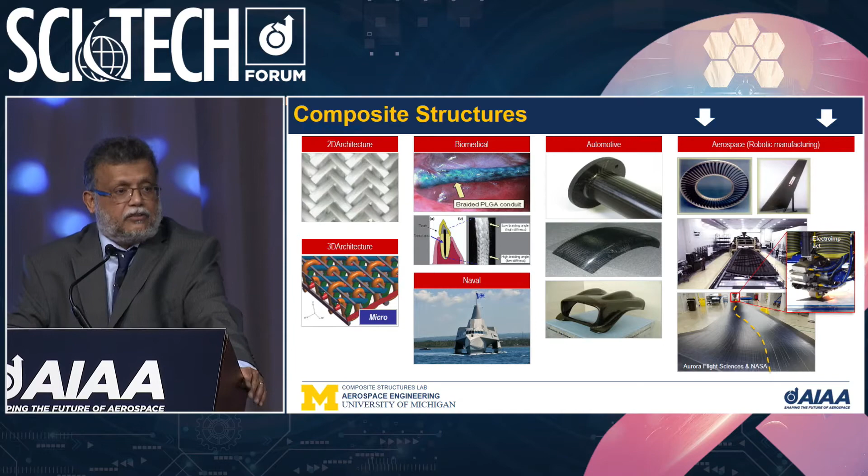In aerospace, one of the advances taking place right now is the ability to tailor and use steered fibers, where the fiber path can be tailored as shown in this slide, showing a wing surface built by Aurora Flight Sciences, now part of Boeing. There are tremendous advances, and that particular wing is now at the University of Michigan atrium because my colleagues and one of my former students were involved in the design.

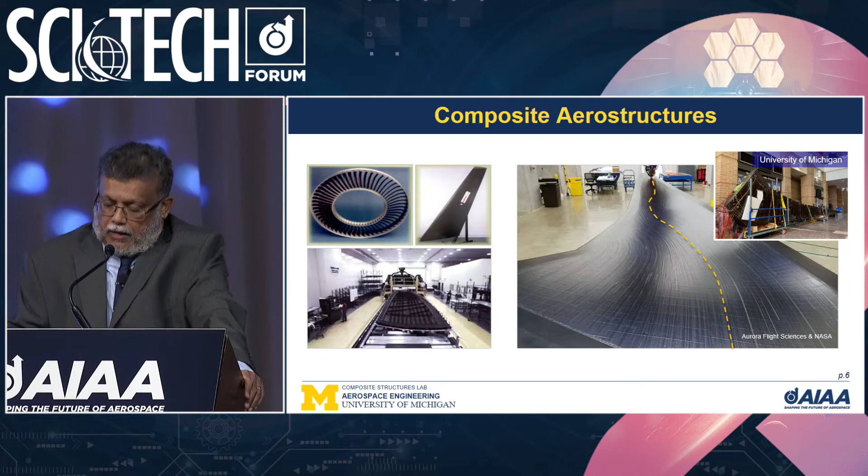There are many parameters that go into construction of an AFP type structure: the machine, the layup head, the slit tapes that are laid up to make the structure, and control parameters such as tension in the tape, temperature, etc. When we develop digital tools, we must account for the effects of the manufacturing process on the finalized structure. I'll come back to comment on this later in my talk.

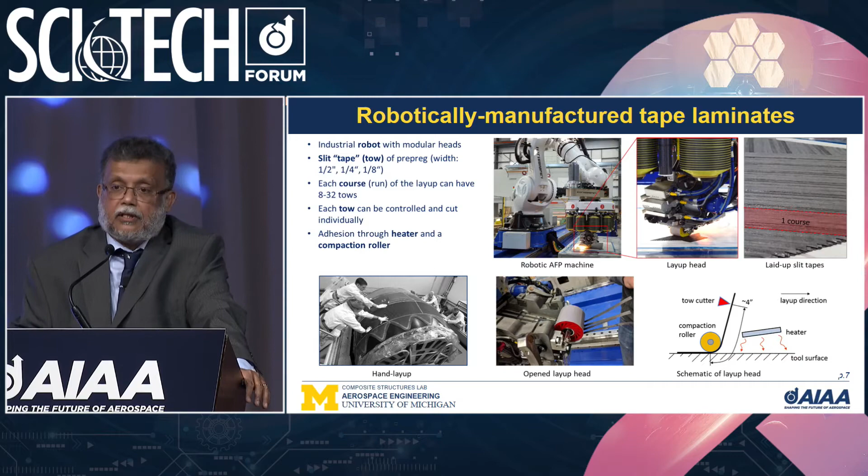Along with the tape structure, you are necessarily introducing length scales, all the way down from the molecular level. We heard talks at this conference where researchers studied curing of a thermoset resin at the atomistic level. If you track that process to the structural level, you find the material has different length scales, starting at the atomistic level and going up in hierarchical order. The question becomes: if you build digital tools, at what level do you encompass these details, and what are the effects of those details on a particular outcome you're interested in?

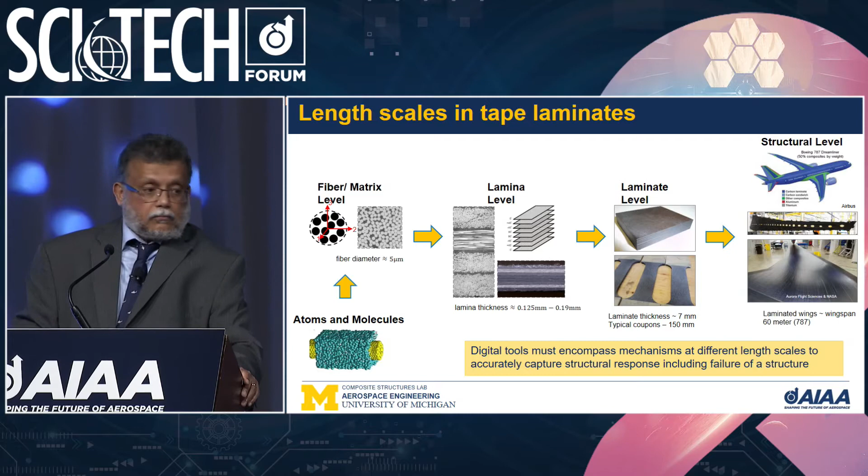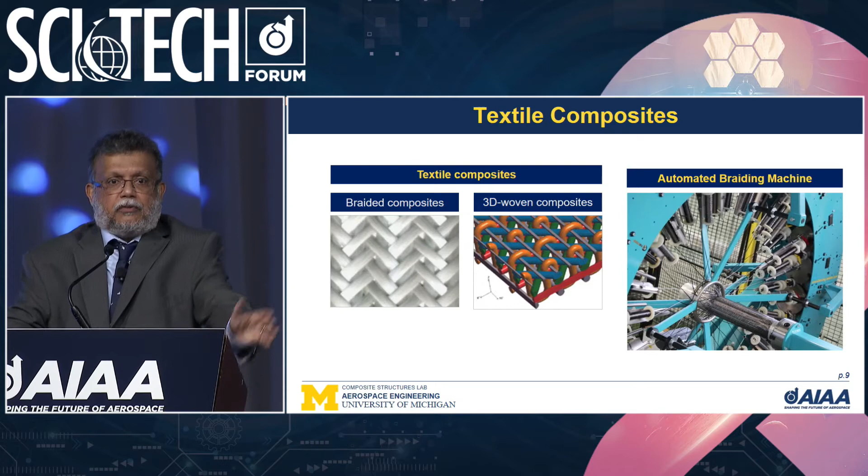Textile composites are another type of material extremely useful for the aerospace industry. Here I'm showing examples of braided, 3D woven composites, and a picture of an automated braiding machine. These types of automation allow designers to realize structures they could not otherwise manufacture with traditional approaches. So the design space for composite structures is becoming larger as we adopt newer manufacturing techniques.

Along with the manufacturing process of textiles, again you get length scales coming into the picture. Here I show a 3D reinforced composite, and within that structure you get different tows. Within the tows you get fibers and matrix, and you have a binder tow that binds all the layers together. All of these details become important when we look at the performance of a composite structure, particularly performance in fatigue and when we want to look at ultimate loads, etc.

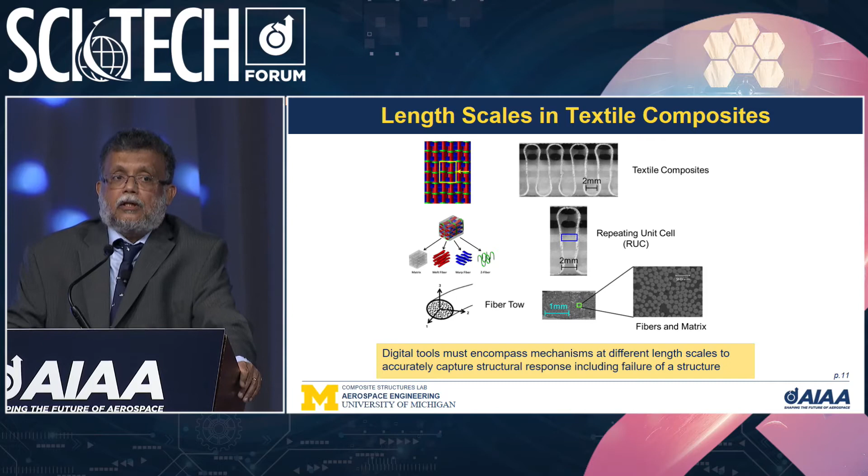Now, the building block approach is a mainstay of the aerospace engineering structural development process. This chart, from a paper by the director of Boeing BCA, Steve Chisholm, nicely captures what happens in the building block process. You have material property evaluation at the bottom of the pyramid, design value development where you do subscale tests, and then analysis, verification, and tests of a larger structure, including a final load test for a built airplane, for example.

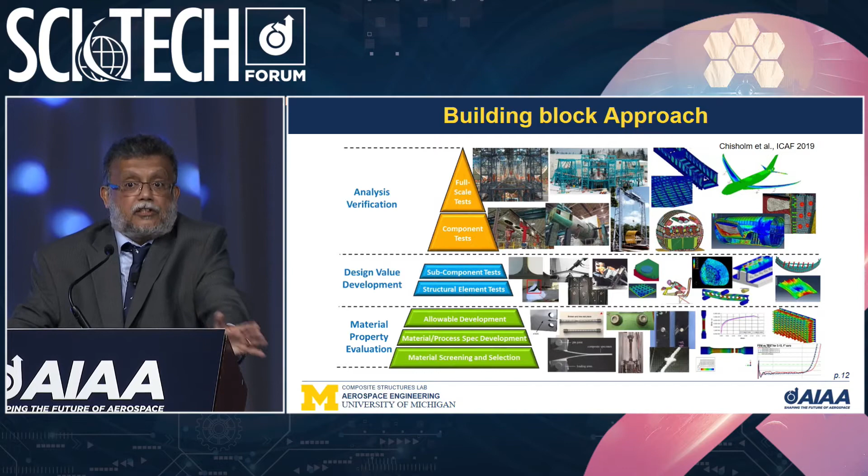On the right-hand side, I show numerical or digital tools that attempt to produce or predict what can come out of a building block experimental approach. So the final goal of a digital tool is to be able to replace that building block approach, except for the top of the pyramid, using digital tools for the rest. If we can do that, it will lead to tremendous cost savings.

Steve Chisholm coined the term smart testing in that paper. I like that, because it means you can combine selective tests with digital tools that are verifiable and validated, to save the funds needed for unnecessary tests used to validate a design process. When you develop digital tools, the design process is accelerated, product development occurs faster, costs come down, and your design space also becomes wider.

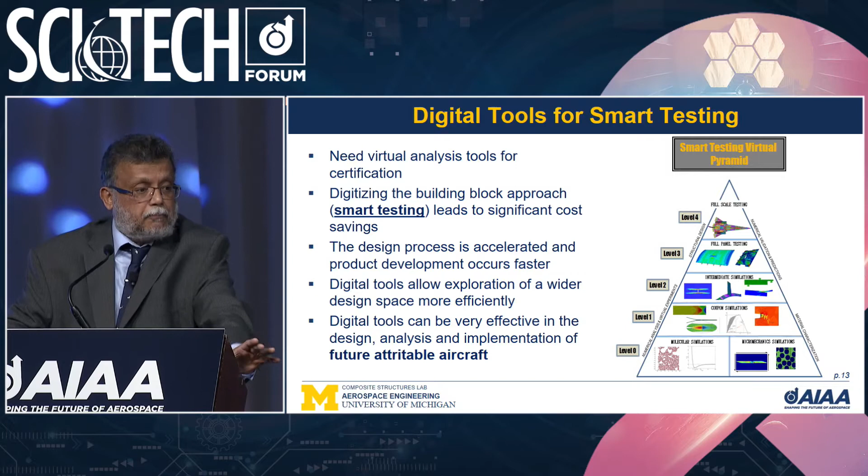Furthermore, you heard in the plenary talk the need for attritable aircraft in the future. If we are going to win in developing attritable aircraft, digital tools become indispensable. Without them, it will not be cost effective to take on attritable aircraft. So I show a smart pyramid building block, where every layer is a virtual test, not a single layer done using actual tests. They are all done virtually. So the word smart testing is appropriate for such a pyramid, perhaps except the last final test at the top of the pyramid.

Digital tools have been around. The NASA 2040 roadmap calls for developing integrated computational materials engineering, or ICME. Myself and others have added the word 'structures,' because for this community we need more than materials engineering; we need to design the material along with the structure. So instead of ICME, a more appropriate term is ICMSE, which encompasses all the tools used in airplane and spacecraft design: structural analysis, manufacturing, material databases, MDO tools, integrated into a digital framework for the design process.

First I want to talk about digital tools for performance modeling. Many in the audience know you don't need sophisticated digital tools for every problem you encounter as a structural engineer. For example, buckling, free vibration, and certain post-buckling problems don't require high fidelity. Standard finite element commercial software can handle these as long as you know the element types and correct boundary conditions.

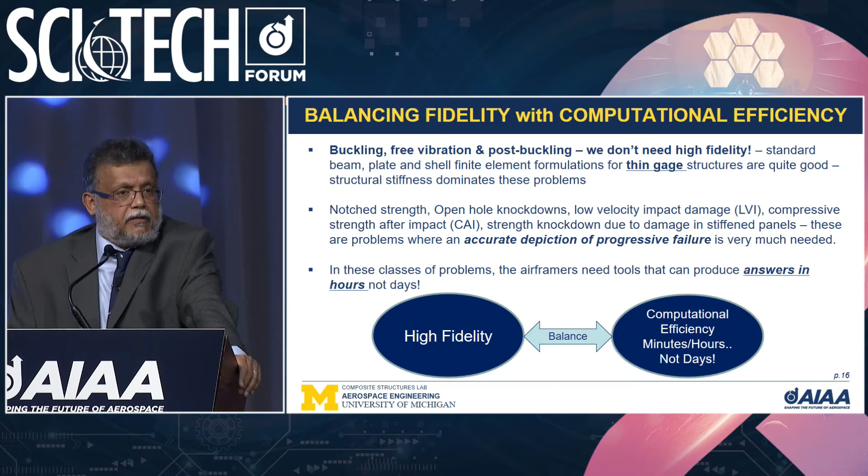Furthermore, if you speak to airframers at Lockheed, Airbus, Boeing, Spirit, and other large manufacturers, they'll tell you they cannot afford sophisticated digital tools that run for several days. They need trade studies and computations that run in a few hours. So the challenge to the community is: how can we develop digital tools that capture the details we want, yet run in a few hours to be useful for structural design?

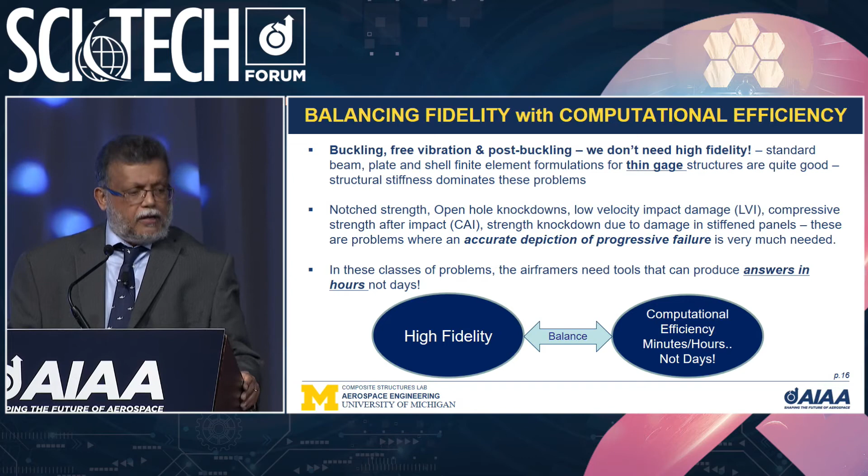I'm going to show some of the research we did at Michigan and the University of Washington over the last 25 years, developing the tools we arrived at. The key is managing the balance between high fidelity on one hand and computational efficiency on the other.

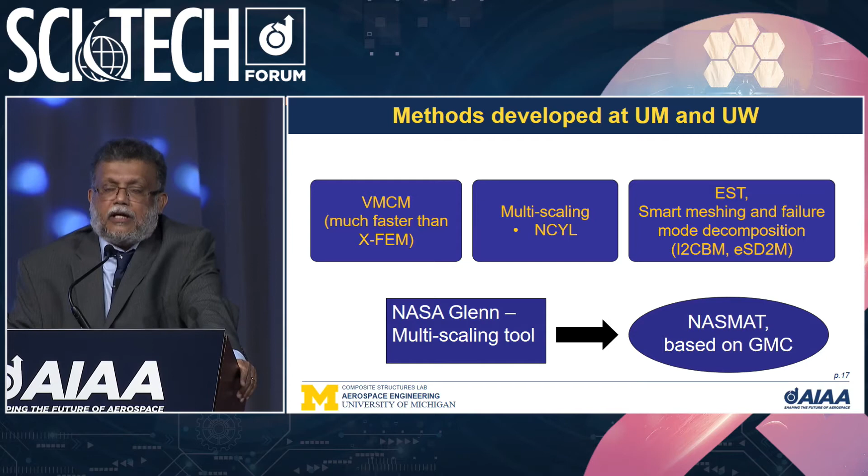The tools we developed at Michigan and Washington have acronyms: VMCM, which is much faster than XFEM; a multi-scaling tool called NCYL; EST, a tool heavily used by many; and recently a smart meshing and failure mode decomposition procedure that I think is one of the best digital tools we've developed in my career with my students. I also want to acknowledge another multi-scaling tool from NASA Glenn called NASMAT, based on the generalized method of cells introduced a while back, which is now mature enough to enable very fast computations.

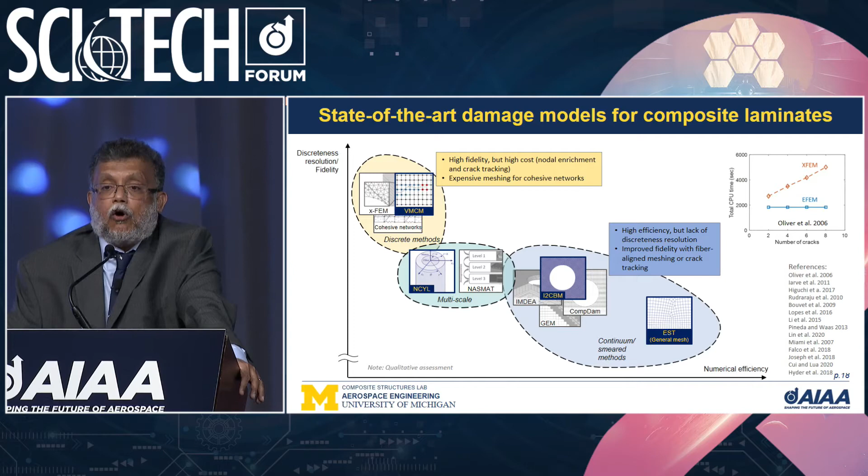On this chart I've put references and a very important plot. It shows the number of CPU seconds a computation takes versus the number of cracks, or you can think of it as the number of damaged features. Embedded finite element methods do not scale with the number of cracks; they stay flat. Whereas XFEM-type methods increase linearly with the number of features introduced. So the conclusion is that XFEM-type methods are not practical for structural design or progressive failure analysis of composites.

We developed this semi-discrete damage model, ESD2M, along with all the other tools at Michigan and Washington, highlighted in blue and maize: VMCM, NCYL, I2CBM, EST, and ESD2M. They're all published in the open literature; if you're interested, you can ask me. That map shows where each tool lies with respect to fidelity and computational efficiency.

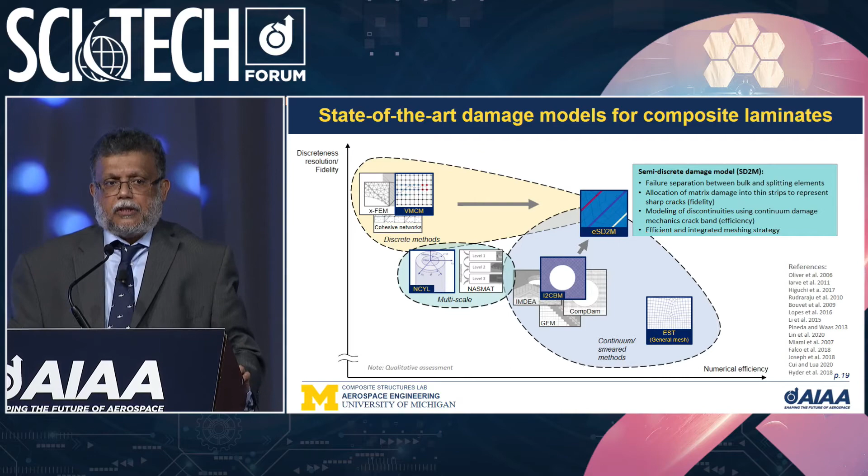So the key to this ESD2M model is the separation of failure modes and an accompanying smart meshing procedure.

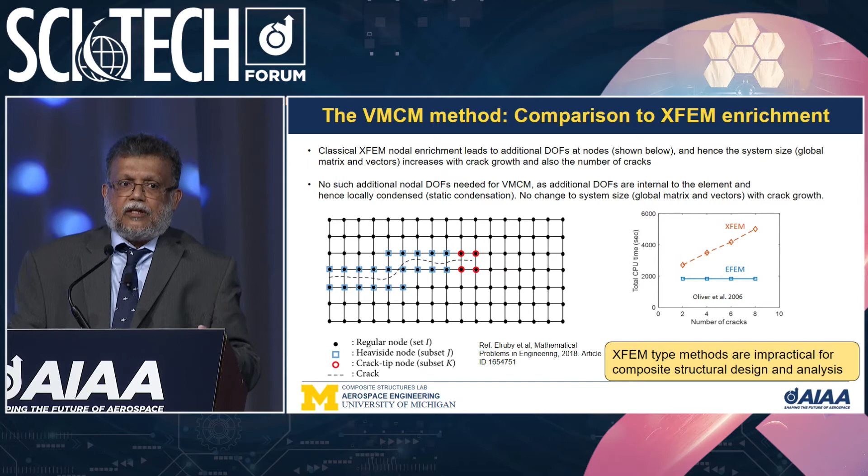Now, the VMCM method, when I compare it to the XFEM method, for those interested in some of the details, you'll see that in the XFEM method, as your damage, let's say a crack, occurs in a structure and the computation proceeds, it keeps refining the mesh by increasing the nodal degrees of freedom. So what starts out as an x by x system ends up as a y by y system while the progressive failure is occurring. The result is that your solver, which solves your standard Ax equals b problem every iteration, starts to grow.

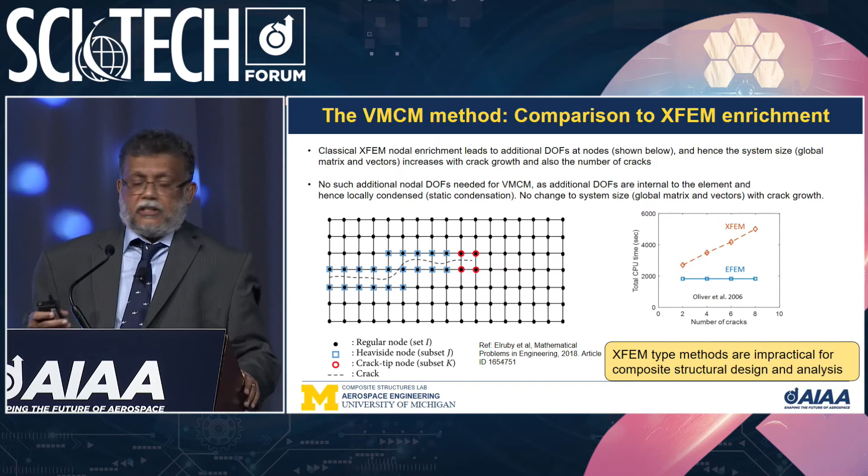A word of caution and a word of encouragement for multiscaling methods. What are multiscaling methods? They take a complicated composite structure — I'm showing here a tank for storing hydrogen, it's a textile — and the tank level is homogenized. It's analyzed as a uniform material, yet we know it's not uniform.

What you do in the solver is, at every integration point in your code, you start looking at the structure at ever decreasing length scales. The second scale is called the mesoscale, where you put details of the tows and the way the structure is built. Finally, within the tows, you have a fiber matrix unit cell, which is the microscale. You pass the strains at every level by solving a problem at every scale and passing strains to the lower scale, then, starting from the lower scale, compute stresses and pass them back to the main solver.

So this is a concurrent multiscaling method which takes time computationally. Your computational time goes up, your resolution is quite good, but we are not yet at a level where we can do this for large scale structural problems. At the end of the talk, I will tell you about some ideas I have for accelerating multiscale methods.

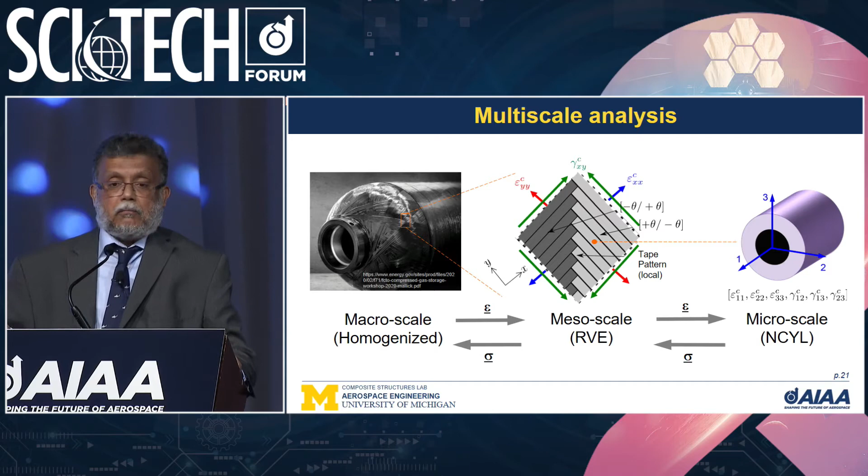The NASMAT code is another multiscale method. The one I showed earlier is the NCYL method that we developed at Michigan. NASMAT is a plug and play type module developed by NASA Glenn. The prime movers are Evan Pineda, Brett Bednarczyk, Steve Arnold, and Trent Ricks. The advantage of this code is that you can have several hierarchical levels and introduce several features in your analysis tool.

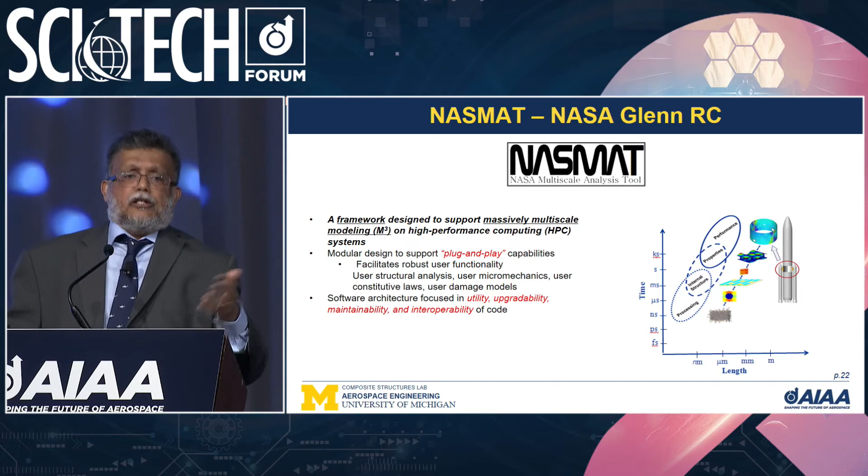Computational efficiency still needs improvement, so much work remains to make NASMAT as efficient as needed for composite structural analysis and design, and there is ongoing work to precisely address that.

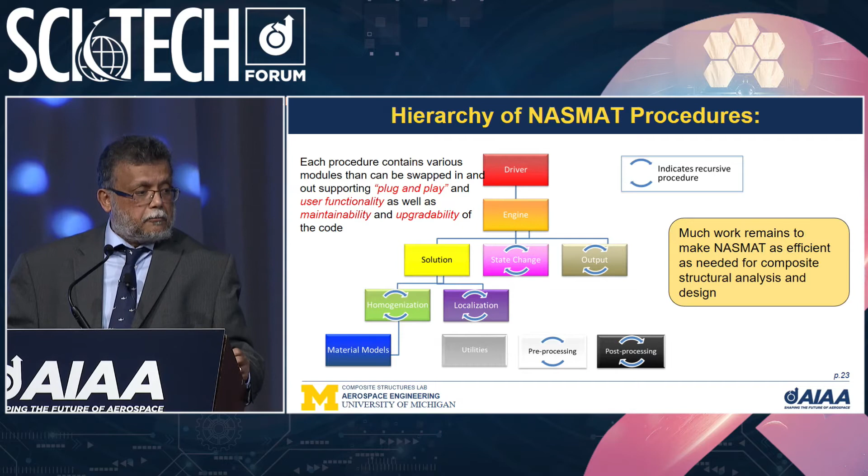Now I want to show you some example problems using the tools we've developed. First is the low velocity impact problem and a compression after impact prediction using EST. EST is a method we developed which uses Schapery theory to model the nonlinear progressive cracking in a thermoset matrix. Matrix resin materials, when subjected to shear, undergo microcracking.

We call that damage because at the length scale of the cracks relative to the laminate scale we're analyzing, those microcracks don't affect it — the scales are separated large enough that at the laminate scale those cracks can be thought of as damage. However, when the damage accumulates, you reach a peak point where you get a macroscopic transverse crack. That's when your stress drops and your strain still increases. That's captured with the crack band method. So EST is a pre-peak nonlinear model for the matrix embedded with the crack band method.

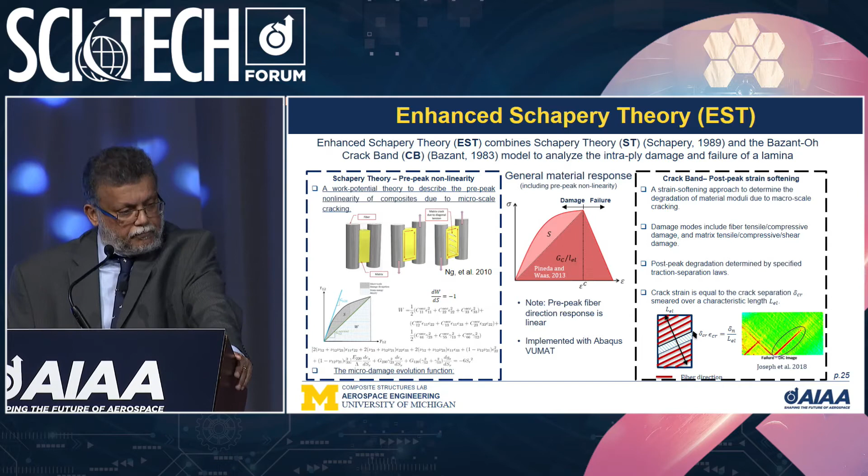That's coded up in any commercial finite element code with a subroutine implementing these features. In addition, we developed the I2CBM code at Michigan, which has an added feature allowing you to put crack spacing based on shear lag theory. You calculate it outside the code and put it in as a crack tracking algorithm. That was a thesis of one of my students, Ashit Joseph.

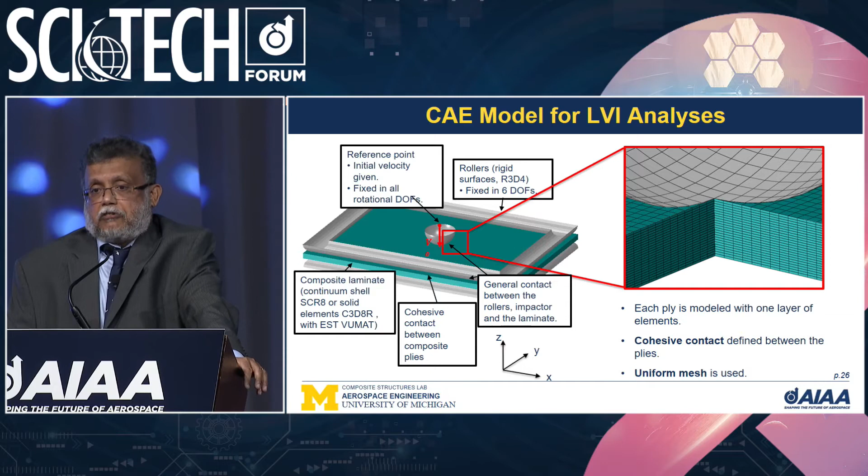The model that we use for LVI analysis is shown here, a standard finite element model, nothing fancy. Here I want to illustrate the problem of impact damage and compression after impact.

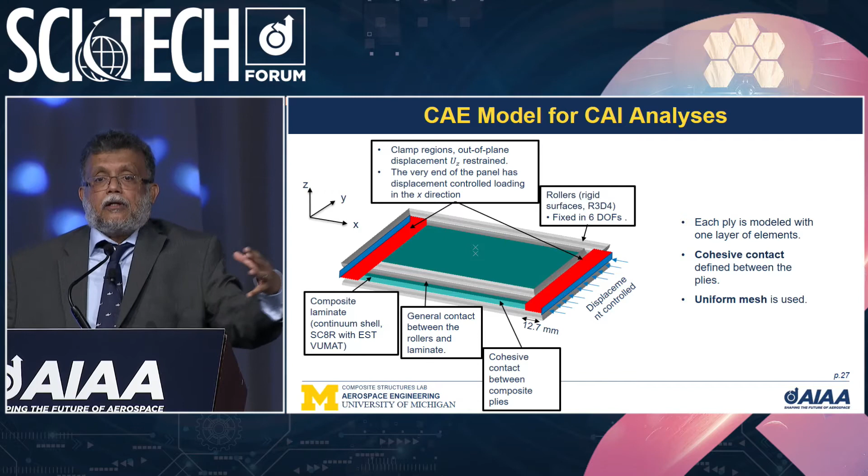The model for the CAI analysis is also shown here, where we model the boundary conditions, the rollers, the support that applies the load to the structure, etc. Now I want to show results.

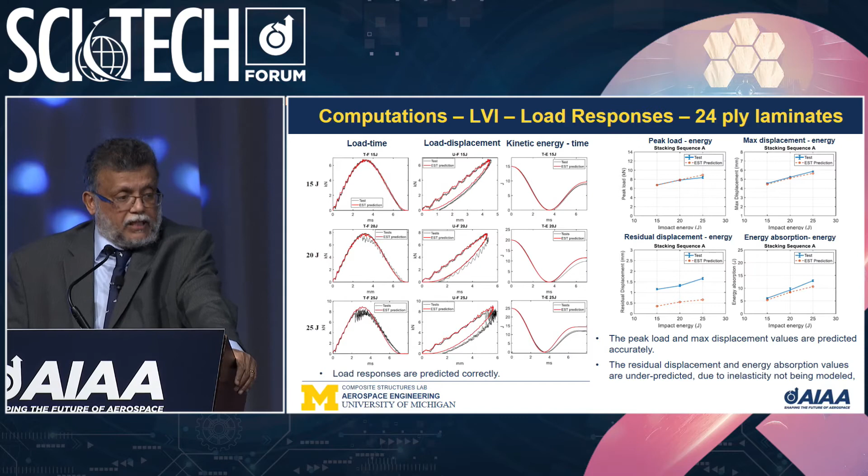You can see that the predictions of the EST theory for different values of impact energy agree very well with the experimentally measured impact damage responses. I'll show you the delamination areas and cracking as well, but these overall macroscopic features are captured quite accurately with the EST tool. These are for 24-ply laminates.

Here's a movie that shows, on the right-hand side, the impact damage predicted by the EST tool, and on the left-hand side, a high-resolution micro-CT image going from the top of the laminate into the interior, showing ply by ply what happens to the delamination areas.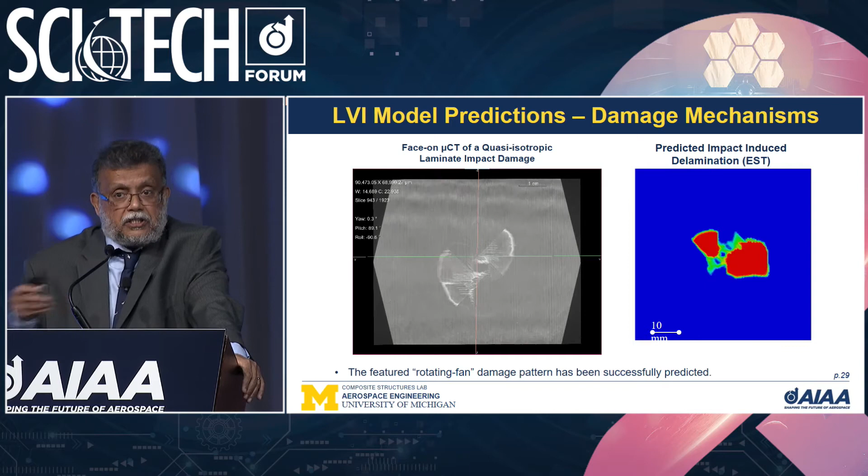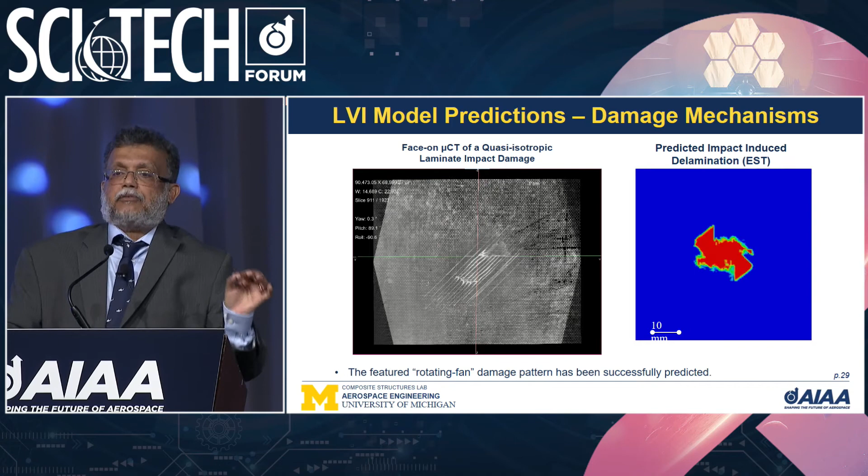So the delamination shapes are captured very well, and the reason I say that is that for the problem of predicting compression after impact, you don't need a high-resolution tool to capture each matrix crack. What you need is to capture the delamination patterns correctly, which is what EST does.

It's also able to capture the damage footprint for different layups, which is another test for a code—can you do this when you change the layup in a laminate? Here you can see that both the experimental results and the EST predictions are well within the levels of accuracy one would want for a predictive tool.

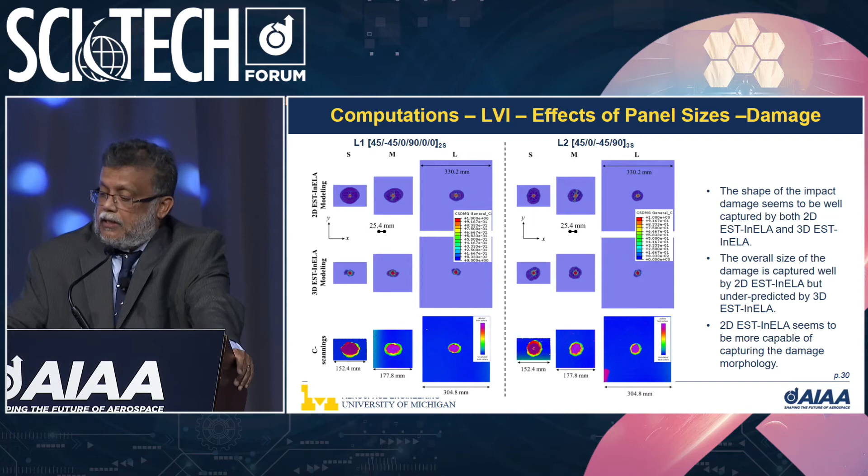When we go to compression after impact strengths, it's all done virtually. The impact is done virtually, computationally, and that computational model is then subjected to compression.

You can see that for the different stacking sequences and for different impact energies, for 3 different layups, the prediction error in the strengths is at most 7.5%, which is pretty darn good for a computational prediction, because these tests take quite a bit of resources.

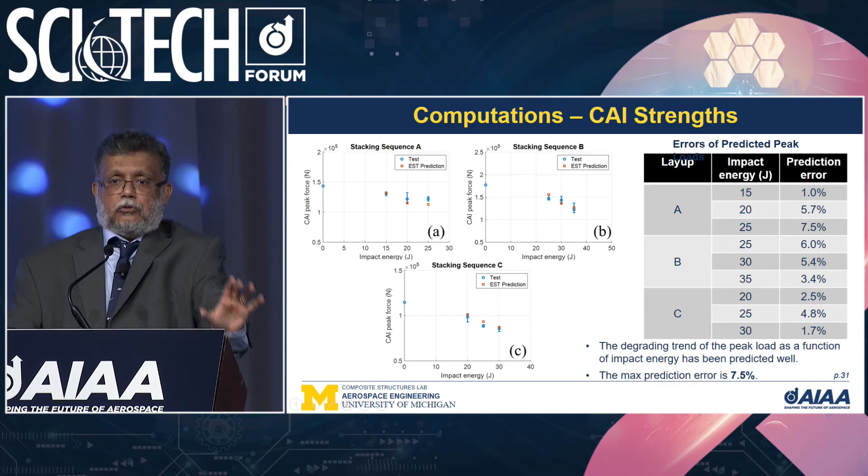So we are very confident about EST as a tool to predict impact damage and to predict compression after impact.

Here is a movie showing some of the details of the impact damaged specimen, going again through a micro-CT full 3D high-resolution image, and on the bottom a corresponding finite element prediction of the same process, where you go right through as shown in the sketch above.

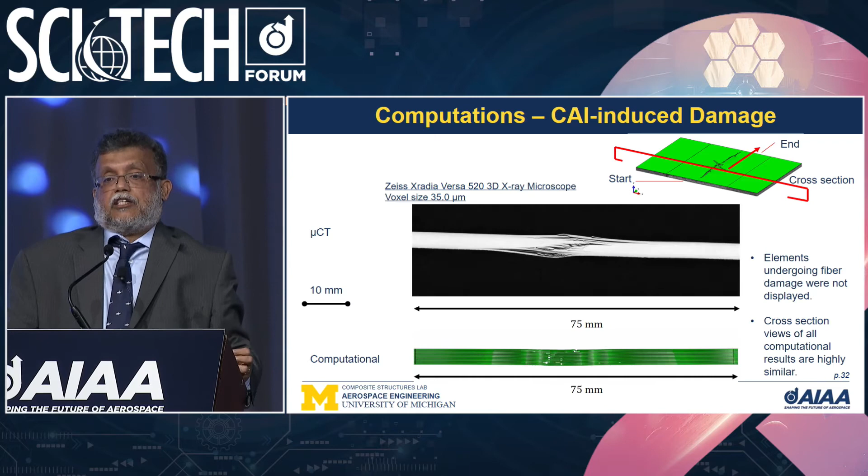Again, the asymmetry in the damage—because once you impact a laminate, the symmetry with respect to the center line is destroyed—so when you apply compression, the asymmetric response is captured accurately by the EST tool, as seen in the experimental predictions right there.

Now I want to show you examples of the 3 features used in this eSD2M model, which is a higher resolution model than the EST model. The major objective is to capture the interaction between delaminations and matrix cracking, which is not important for the compression after impact problem, but is important for the other problems I alluded to.

So there are 3 areas I want to emphasize: 1, a smart meshing strategy; 2, the fact that these materials do not have the same strength at every material point—I'll come to that later in my talk because of the process we use to manufacture them; and finally, the constitutive model, which is the Schapery theory model that we use with the crack band technology I talked about earlier. So the smart meshing tool, the probabilistic modeling, and the constitutive model all must go together in order to get the predictions I want to show.

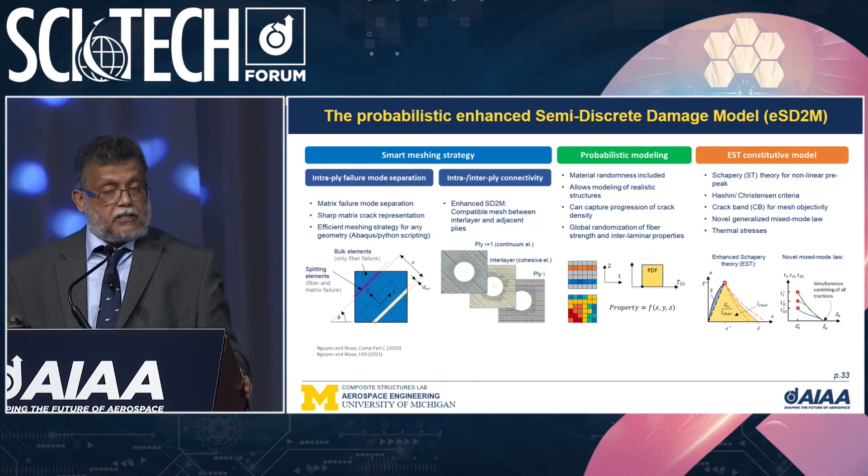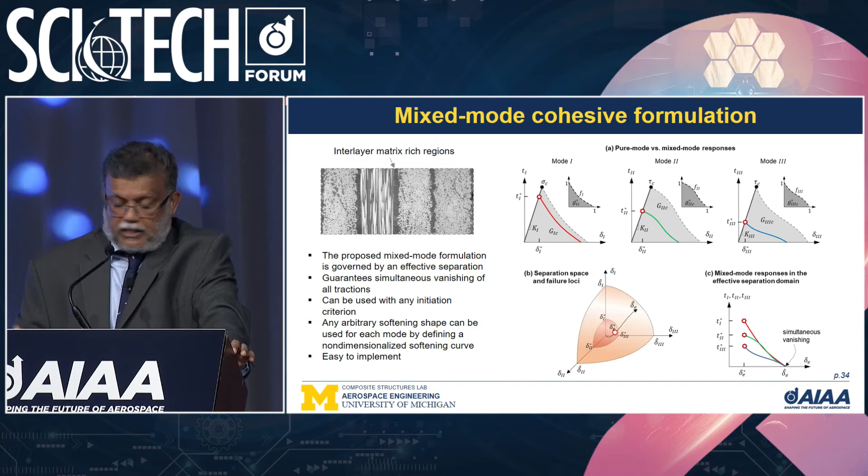Most of the damage modes are mixed mode. That means damage is not occurring because the state of stress is uniaxial. In fact, most of the time these damage modes occur in a multi-axial stress state, which means you must have a good mixed mode formulation to get correct results. One key is that when a damage zone passes a point, all the tractions in the cohesive law must vanish simultaneously, and that's assured with this new mixed mode formulation we've adopted.

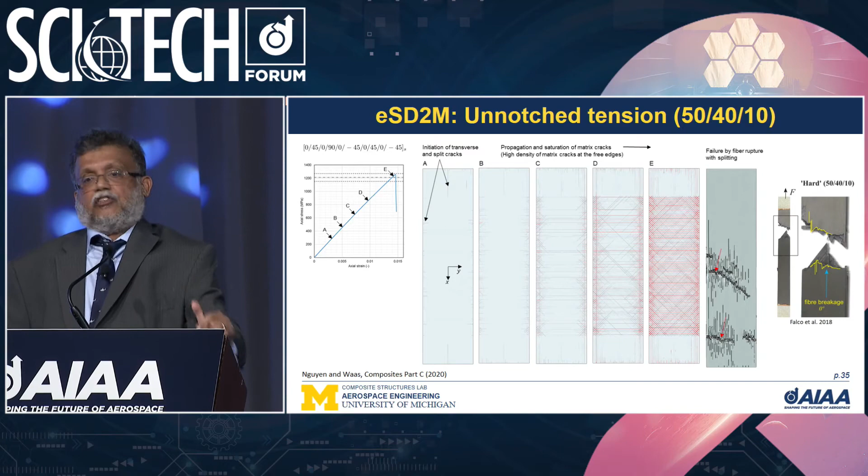That's a feature of progressive failure. When you have progressive failure in a composite, the symmetry in your initial undamaged structure is completely destroyed. So at every successive load step you have an unsymmetric, completely general laminate. That's why your final failure in that inset looks the way it looks, with delamination, rupture, etc. Very unlike a metal specimen.

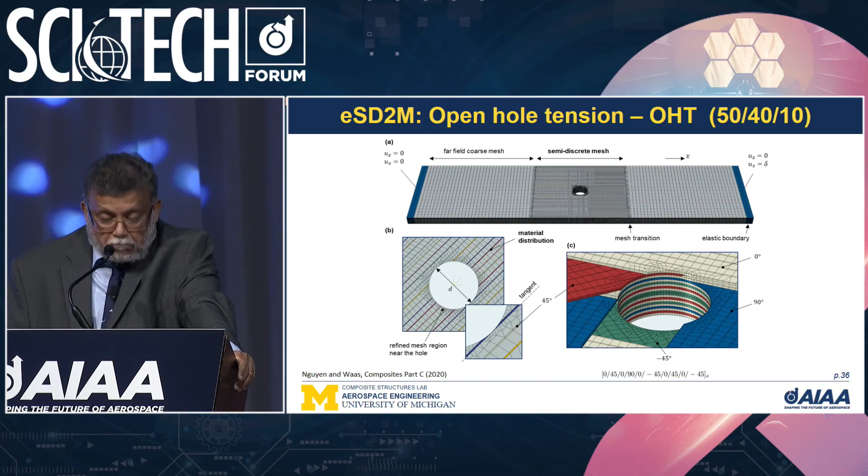Here is an open hole tension challenge presented to us by the Boeing company, showing the smart meshing tool, and I'm going to show predictions for this particular laminate. What's interesting is to see how edge cracking, splitting at the hole, is captured very early on. The splits occur almost at 50% of the ultimate load.

But is that of concern? Absolutely not, because the splits do not have enough energy to grow until you keep increasing the load. So just because you get a split at a notch doesn't mean the laminate is no good. If you look at the final failure load, it's almost twice the load at which the split initially occurs.

We have captured the angle cracks, the splits in the zero plies, the transverse cracks, macro cracks, splitting cracks in the 90 plies, and finally the way the laminate fails.

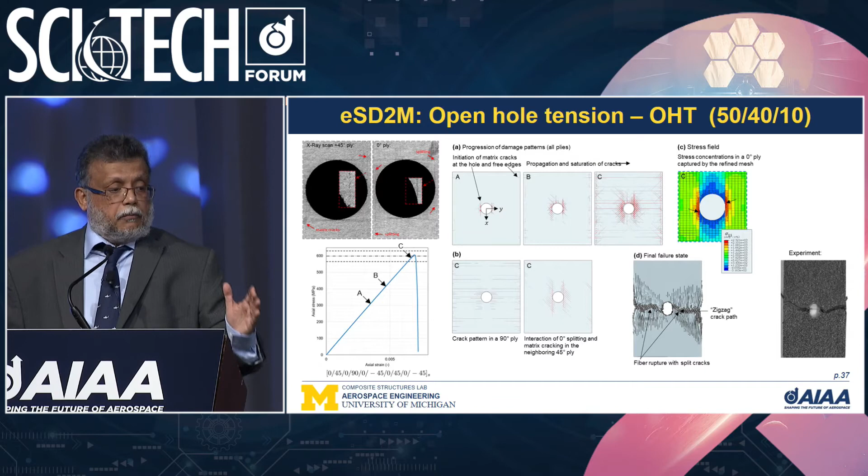These were blind predictions that we did for these types of laminates. We did this as a function of the size of the hole to the width of the laminate, as well as keeping the hole size fixed and changing the width. Here I am showing results where we kept the scales the same, so the ratio of the size of the hole to the width is kept the same.

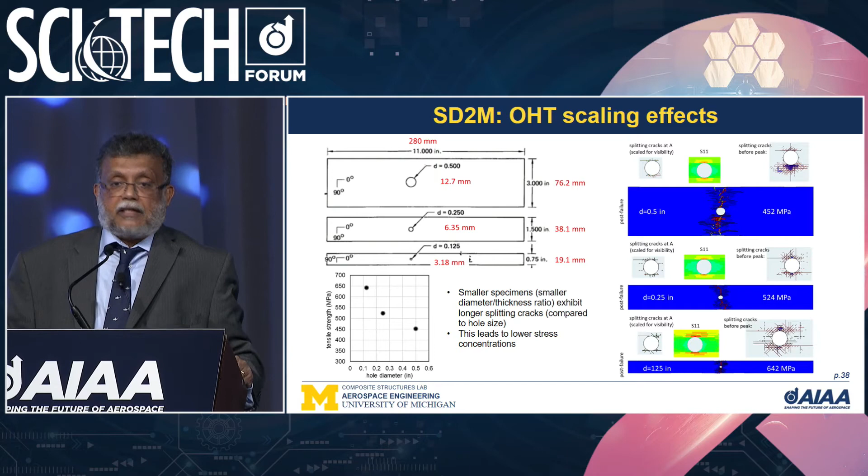These tests were done at the Boeing company. We are able to capture the notch strength, hole diameter trend that you see in these types of laminates. Furthermore, we are able to capture the failure mechanisms very accurately in all 3 different scale tests. All runs took less than 4 hours.

Finally, I want to show you a very challenging problem: delamination migration. Delaminations that start at one layer migrate to a different layer because they are energetically favorable.

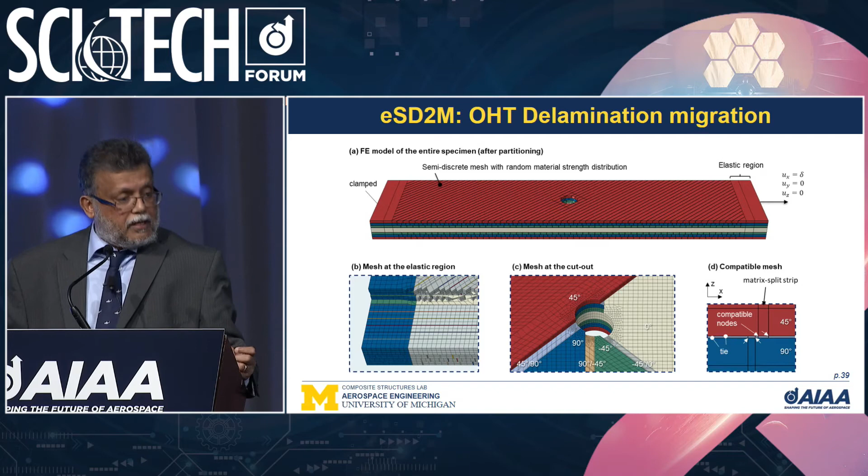Here I am showing these laminates where the testing was done at the University of Bristol by Stephen Hallett, Michael Wisnom and their co-workers, showing the mesh and the details of the layup. What's interesting about this particular test is that the load deflection curve is non-monotonic. It has a first peak, the load drops, stabilizes, and then increases again until you get complete failure.

The movies show our predictions, and on the right hand side we show the actual pictures published by Green, Wisnom and Hallett, which show the migration pattern and the way the delaminations migrate along with the matrix cracks, very accurately captured by the ESD2M model.

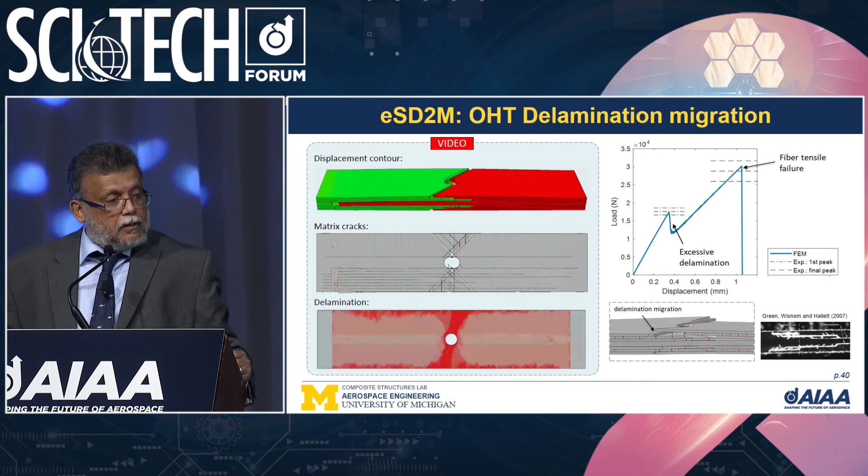Next I want to show this same result for the different scaling that we did, and you can see the experiments and the FE model are very much in tandem, showing the final failure of these types of laminates captured very accurately, with the interaction between matrix cracking and delamination, and the migration of the delamination as well.

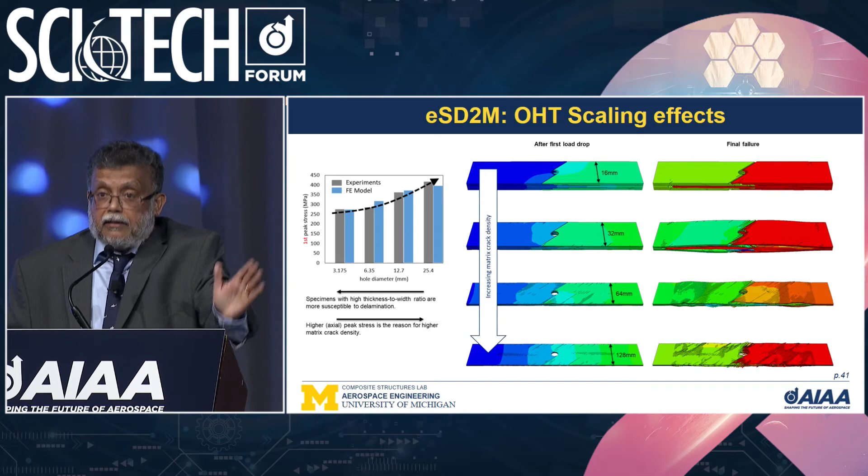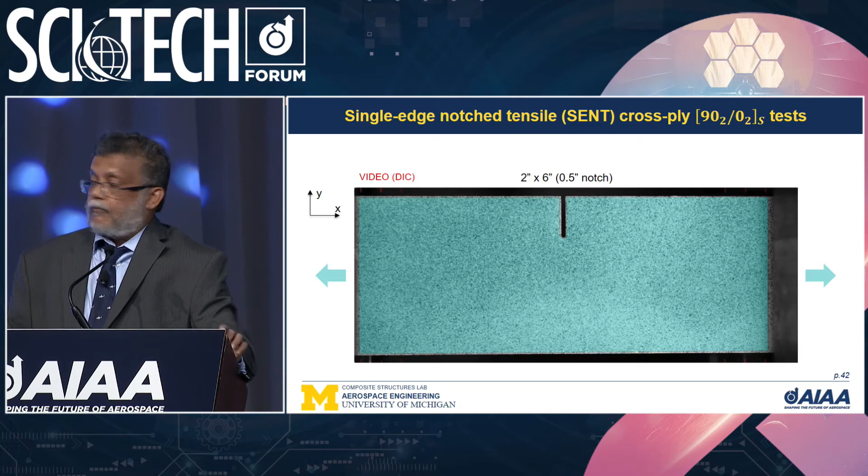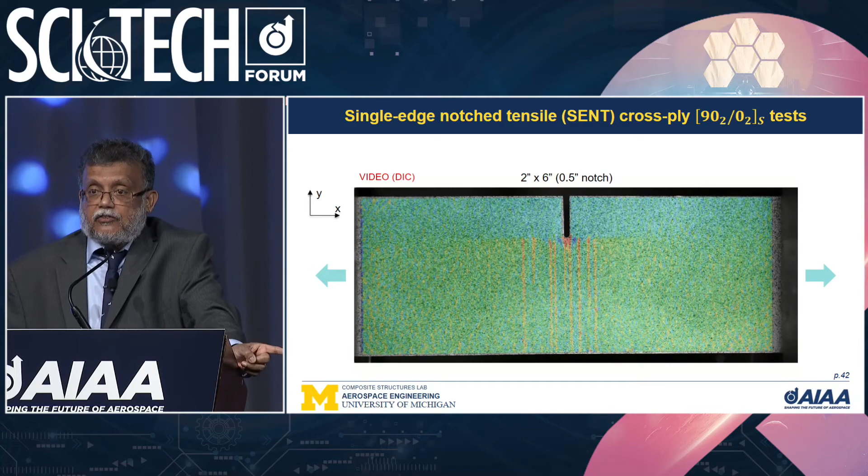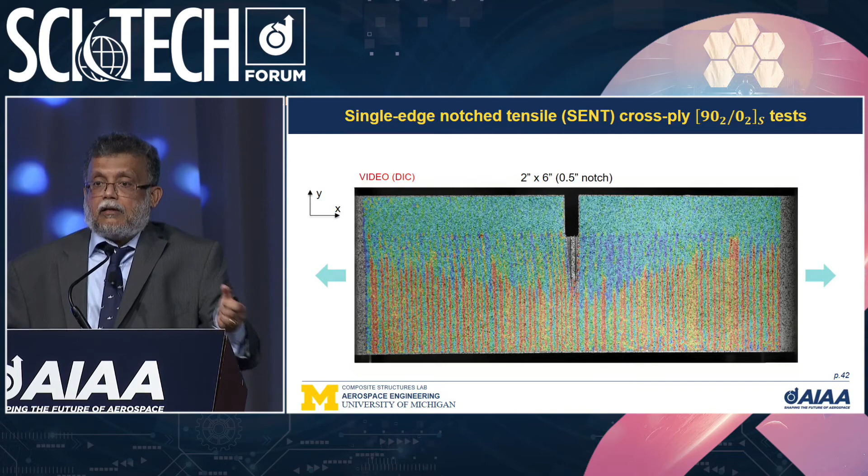So what happens when you pull it is you get notch localization, and you get splits going down the 90 plies. These are DIC results, and you get edge cracks coming from the bottom away from the notch and going up. Finally, you get delamination in a triangular region, and then rupture because the zero fibers fail, which I'm going to show you next.

So these are the pictures you get in the experiments, and on the right hand side I show you the actual predictions by the eSD2M model. You get the delamination predicted correctly, the matrix cracking and the evolution of the cracking predicted correctly, and finally the rupture also predicted correctly and accurately.

The load deflection curves for different notch sizes is shown in the left top, and again we are well within the bounds of what one would expect for these types of laminates where we have different specimens.

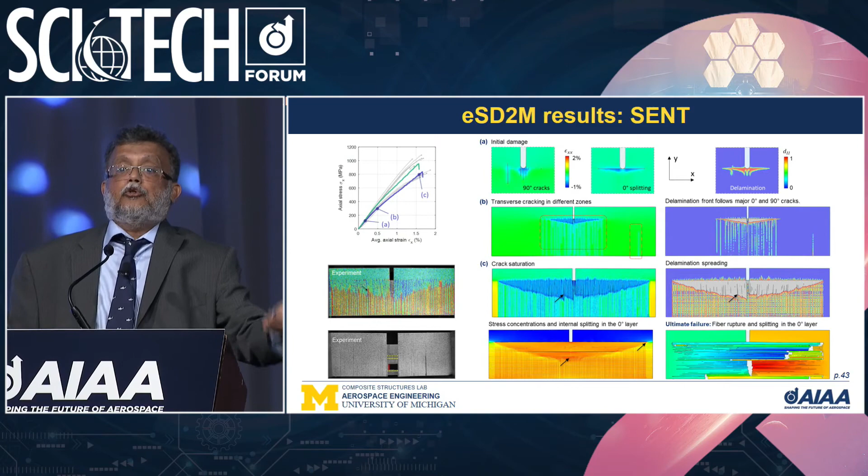Now, one word of caution: when you do identical tests of these laminates, do not think that you are testing the same material. You're not, because the manufacturing process causes the strength distribution in each laminate specimen to be different. So what you have is a stochastic distribution of strengths in the laminate. And when you do this virtual model that we are presenting, it is like doing tests, because each computational run uses a different strength distribution in the simulation.

Monte Carlo simulations are what allow you to capture that scatter. You can see that the predicted scatter of the strengths between experiments and the eSD2M model is very good. The pictures show the predictions against the actual coupon that you get in the laboratory.

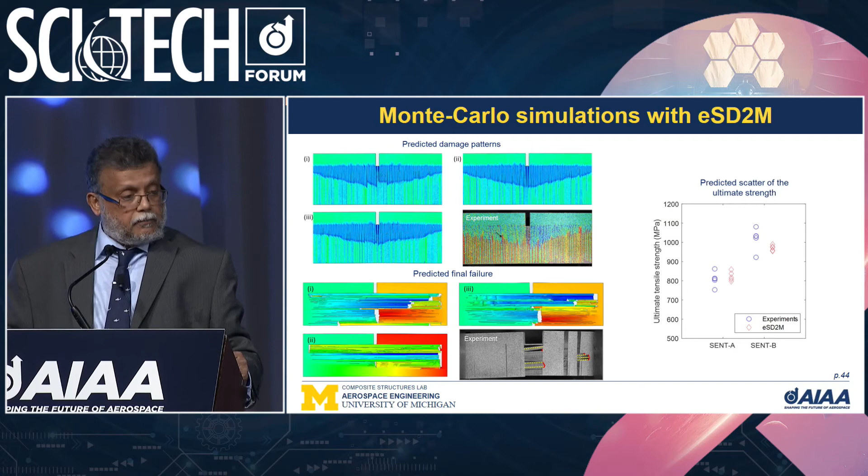Now I want to switch gears to talk in the last section of this talk about textiles, textile composites.

In textile composites, when you look at the process model, you begin to understand why the strength varies. Just look at that thick composite part. If you take two points, one point A on the surface and another point B in the interior - that is a 120 ply thick part, so there's 120 plies in the thick section. There's no way the temperature distribution is going to be uniform during the autoclaving process.

What does that mean? It means there are going to be residual stresses. It means the part is not going to cure uniformly, no matter how much you'd like it to be uniform. That's nature, that's the nature of the heat equation. As a result, the strength on the surface is not the same as the strength in the interior - not because the fibers are at a different angle, but because of the thickness of the part.

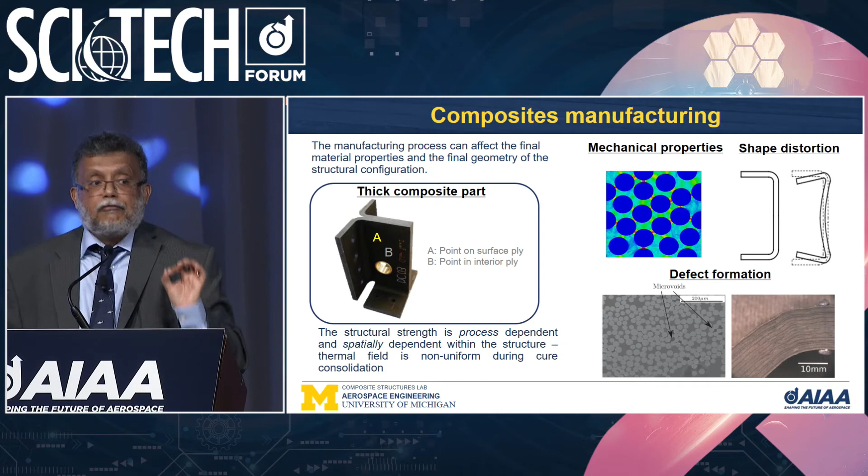So when you cook a thick part, you have a temperature distribution resulting in a strength distribution, which you have to account for to accurately capture progressive failure.

All right, what else? You get defects. If the residual stresses are high, you can have cracking inside the structure before you put it into service. You can have wrinkling of plies, and you can have porosity if the gases within the resin at cure are not able to escape. If you don't account for this, you can get drastic differences between predictions based on virgin properties and predictions based on in situ properties - the properties of the actual resin that's inside the laminate.

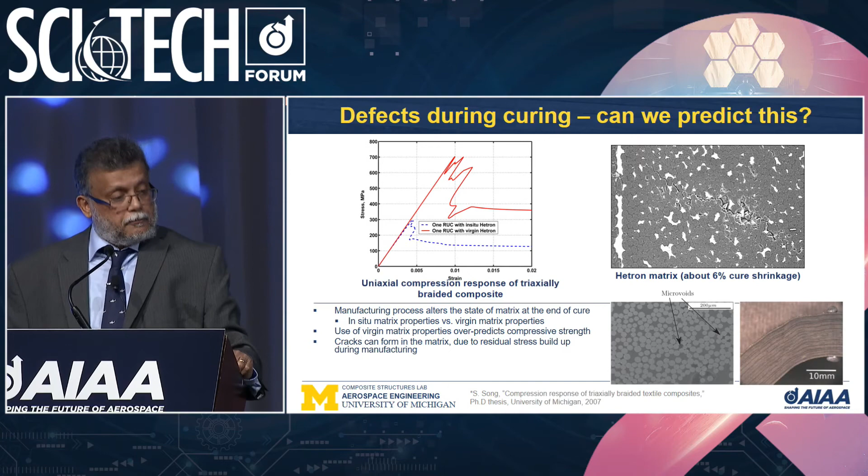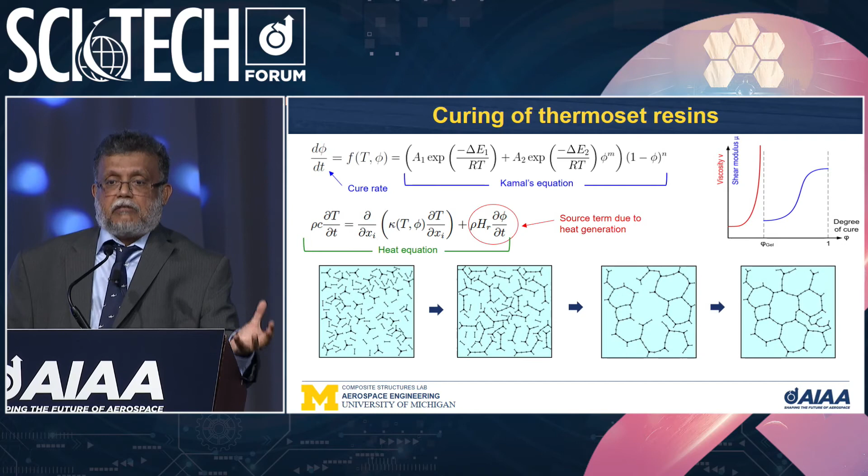Can we predict this? That's the question. So if you want to predict this, you have to go to basics. You have to look at how thermosets cure. They cure by forming networks, and this network formation is governed by what is known as Kamal's equation for the network density. As the networks increase and get solidified, you get a solid developing from a gel-like material. Unfortunately, this happens in the presence of fibers.

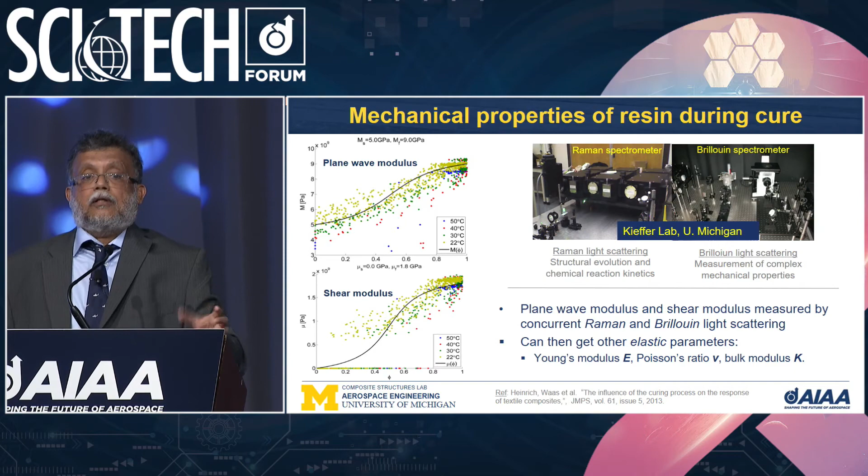But before that, we have a collaboration with our material science colleague John Kieffer, where we measured using Brillouin and Raman scattering how the plane wave modulus and the shear modulus evolve during the curing process, so that from that we can extract the Young's modulus and the Poisson's ratio of the resin during the cure cycle. Now, I want to emphasize that different cure cycles lead to different evolution of curing or solidification of the resin.

So if you want to embed this in a code, what you need to know is how Young's modulus, Poisson's ratio, and shrinkage strains evolve as the cure cycle progresses.

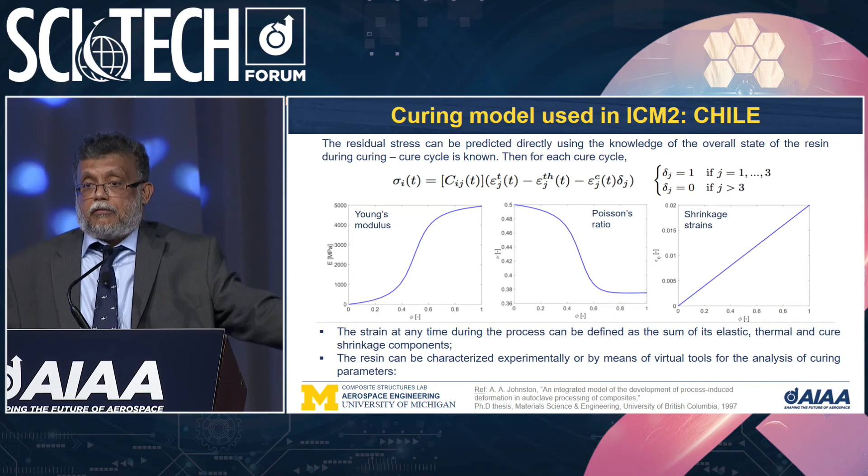There was an excellent talk by Professor Maiaru and her group at Lowell, Massachusetts, who are not only doing this, but going to the molecular level to predict curing.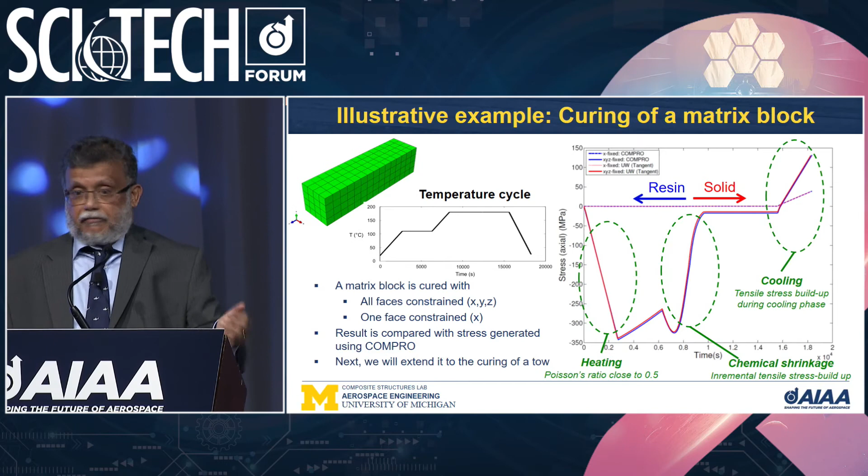When you put fibers in and cure a tow, for example, you get a similar result, except now your heat transfer is going to be impacted because of the fibers.

So here I am showing you our approach to homogenize and evolve composite properties, because we cannot afford to model every single fiber in a textile. This is an illustration that if you use the proper homogenization process, you can get the thermal evolution problem solved for a tow properly using the inputs that I showed.

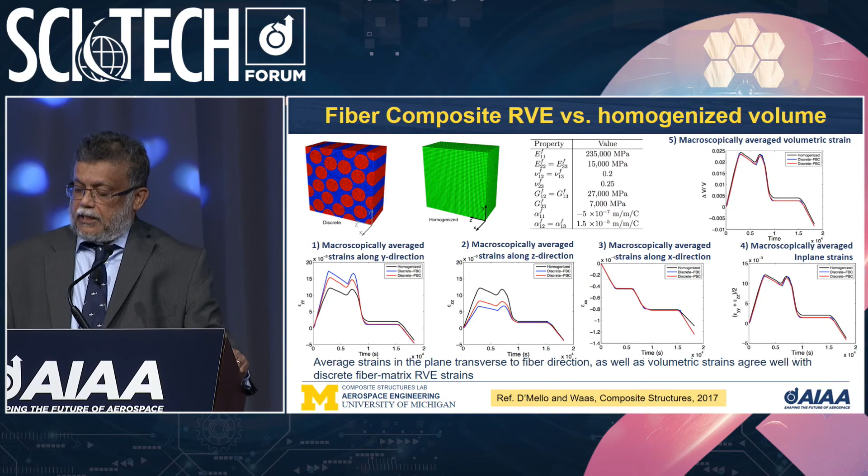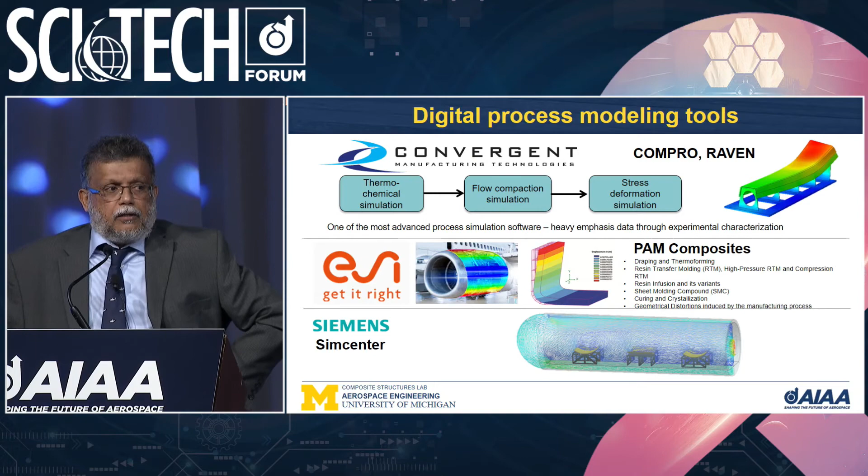Now, there are many tools out there: Convergent, PAM Composites, Siemens, ESI. All these tools provide residual stress and distortion of a part during the cure cycle. What we've done at the University of Michigan is build a tool that does all of that, but in addition, it can also predict damage evolution during and after cure.

So during the cure and then after, when you subject it to mechanical loading. Here I'm showing an illustrative example of a famous noodle problem where I used an exaggerated cure cycle to show how cracking can start near the noodle and then progress up. But if you change the cure cycle, you can suppress that cracking during the curing process.

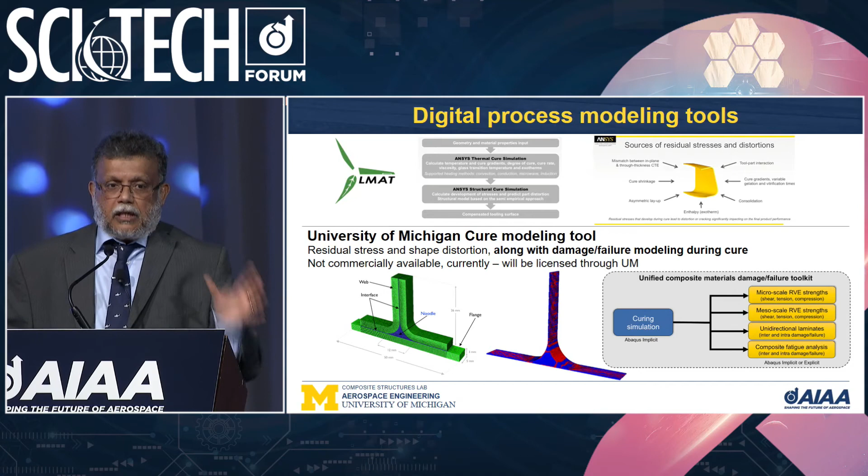So the advantage of a digital tool is that you can do these trade studies to optimize your cure cycle for the particular structure before you set the manufacturing process. That's the reason you want to analyze shape distortion and damage during the cure process.

And you need a resin database. So Convergent, for example, has a resin database for standard aerospace resins, so does NIAR, that shows the thermal property evolution during cure.

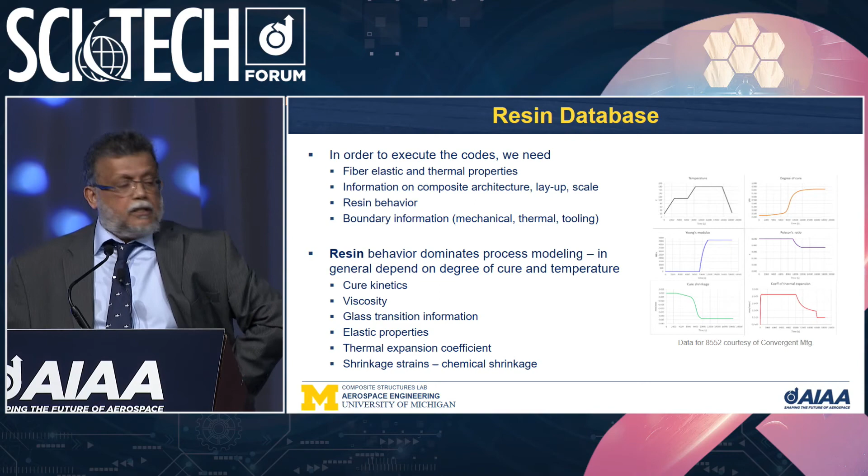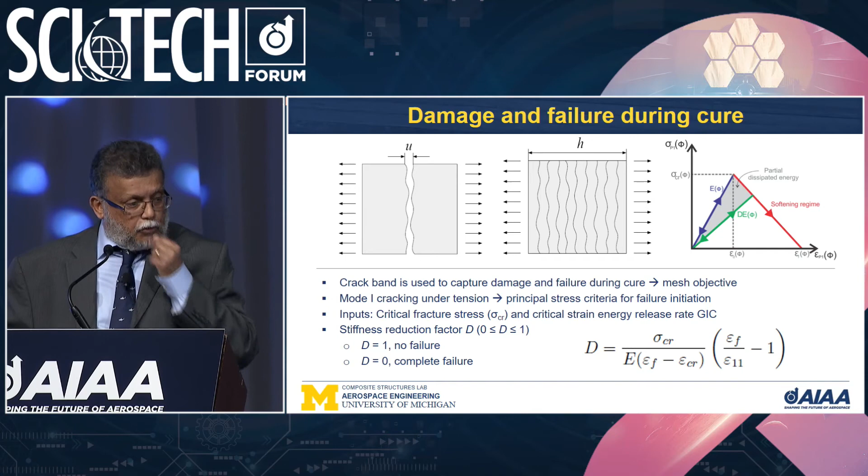Now, this problem is complicated. Damage and failure can also occur post-cure. So again, you need a crack band method to keep things mesh objective, and you need to have the ability to account for damage that can set in. So we've embedded our curing tool with the crack band method in order to do that.

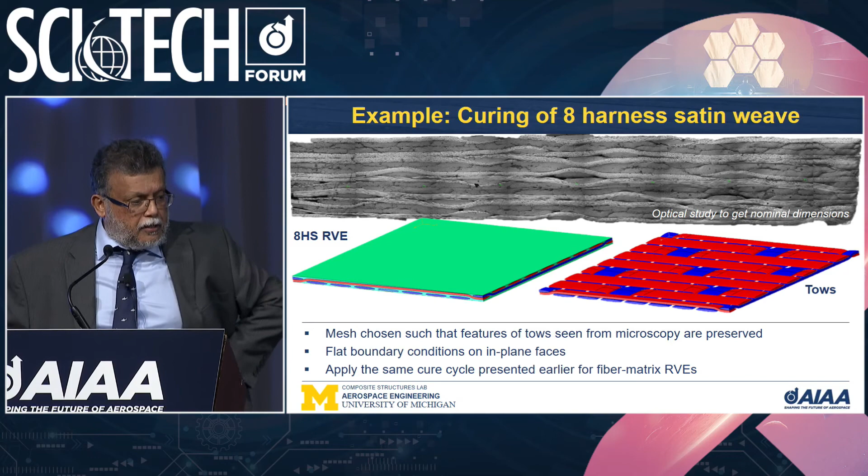So I'm going to show you examples now of a project we did with GE, where we cured 8 harness satin weave textile composites at the micro level, where we made an 8 harness satin RVE. The RVE details are shown here.

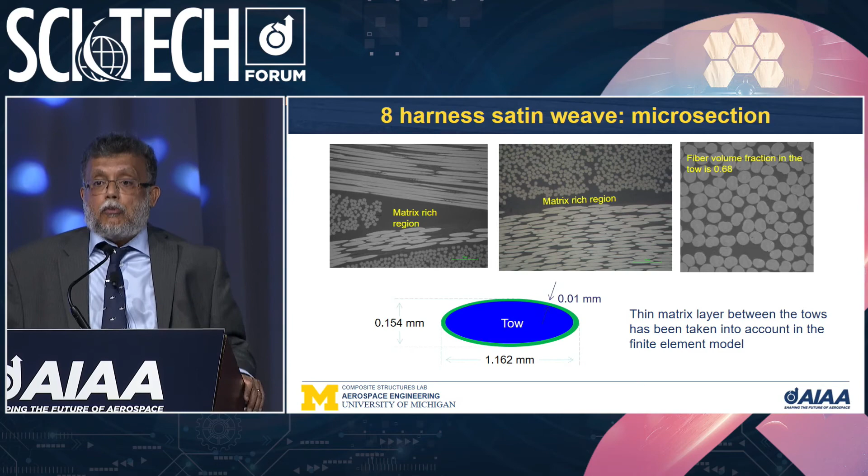As I said, you cannot afford to model every single fiber at this level, so all the tows are modeled as homogenized evolving solids. And then you embed that in a matrix that's also evolving during the cure. We do these virtual tests of tension, compression and shear.

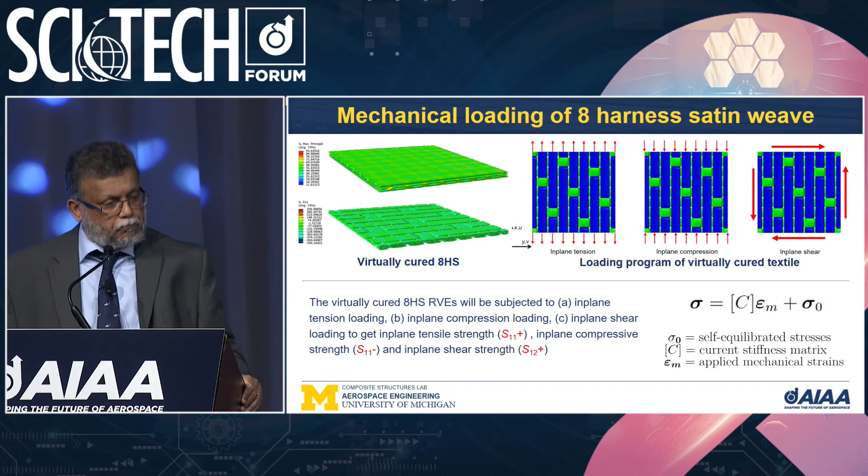And now I want to show you some results and comparison against experiments. So video please. Here I'm showing you how the axial tows in a tension test in 8 harness satin will fail.

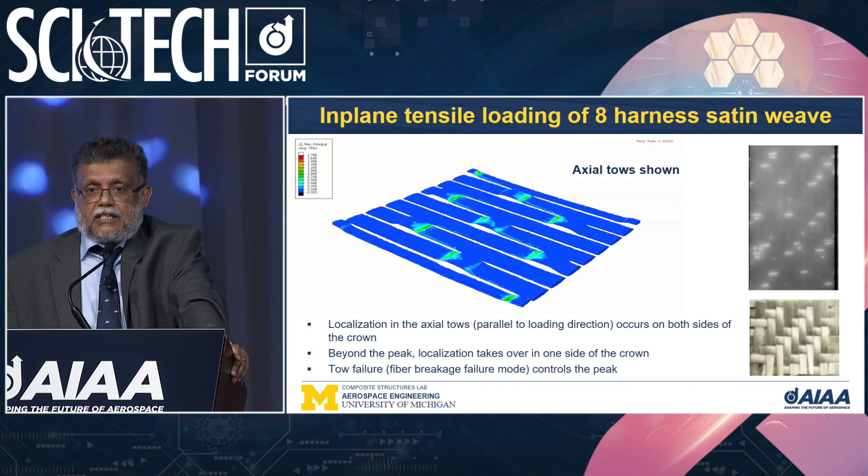As you pull it, the tows get stretched, and where they jump over, you get very high shear and tensile stresses, and you get fiber rupture. On the right, I'm showing you a picture of the exact 8 harness satin specimens with photoluminescence to show how the cracking occurs as well. So the digital tool is able to capture the localization and the failure that occurs in these textile composites.

What's more important is to realize that if you ignore the cure cycle, you can get misleading values for the strengths. You can see here in this plot where we did not cure, we did not include any thermal stresses, and we did virtual tensile tests. And if you include the curing stresses, you get a lower value because there are residual stresses in the matrix.

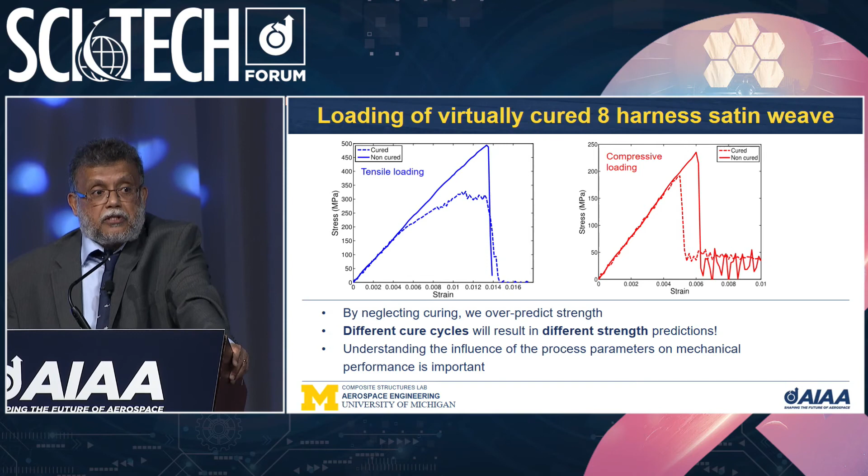Similarly, we show the same for compression. So different cure cycles will result in different strength predictions as well when you change the cure cycle. This is very important to understand for textiles.

All right, so now I want to end my talk by asking a few questions of where are we heading. The NASA roadmap 2040 has many interesting aspects where digital tools will play a major role in the future of composite aerospace structures.

I think personally, if we want to have high fidelity simulations done very rapidly, I think the place where you will see a lot of gain is in machine learning and AI based techniques.

At this conference, I heard two great talks. One was data driven damage initiation for carbon fiber reinforced polymer composites, where the speed of the Mohr-Coulomb criterion was accelerated by 130 times using a machine learning deep neural network. A convolutional neural network for enhancing multi-scale localization in the GMC method of cells, which lacks shear normal coupling, was presented by Pete Gustafson et al., showing tremendous gains in computational efficiency. I think in the future you will see much more of this line of thinking in these types of tools for composite predictions.

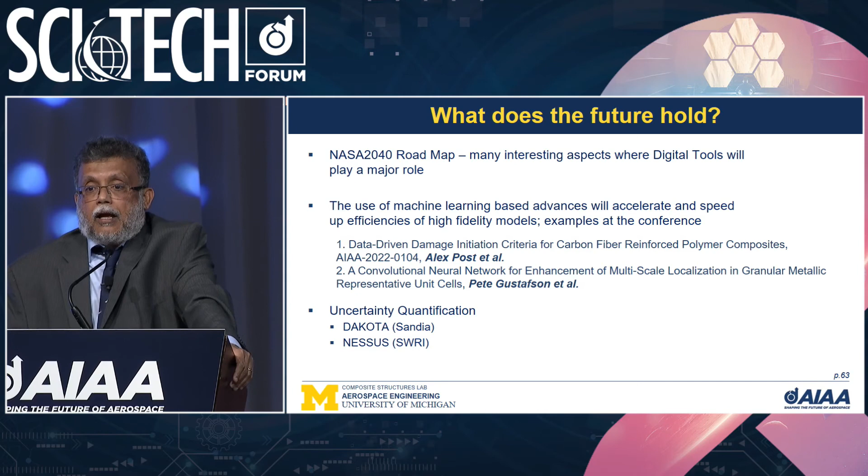Finally, I want to say that there are codes, Dakota at Sandia and NESSUS at Southwest Research Institute, that do excellent jobs in uncertainty quantification. So we don't need to reinvent that tool. What we need to do is work with Dakota and NESSUS to couple the finite element software so that we can also get metrics for uncertainty in our predictions. This is something I'm pursuing right now with both Dakota and NESSUS.

Thank you for listening, and I'll take any questions you have. Thank you.